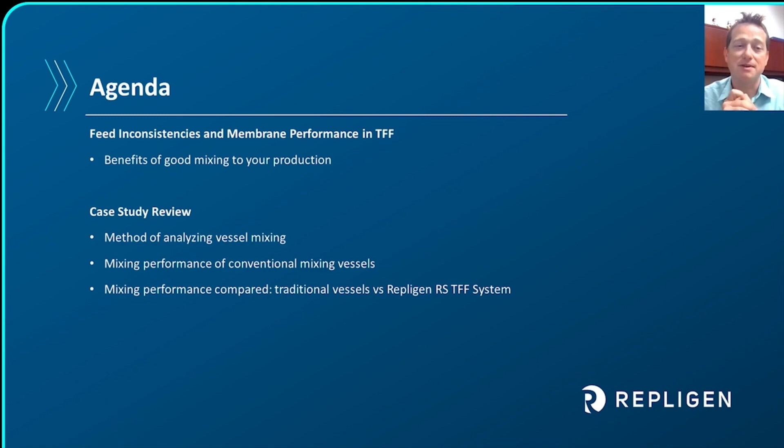In TFF, practice and common sense dictate that if I maintain the same operating and process conditions around my filter, then I should have consistent membrane performance, both between batches and during scale-up. But that's not always what happens. How many times have you experienced changes in membrane performance right after scale-up or between batches? And if I'm maintaining my molecular weight cutoff, my filter format and chemistry and TMP and CFF, why do I start seeing deviations arise? This is at the heart of what our study will address today.

That of all the parameters that are often monitored and maintained during TFF, feed consistency just often isn't one of them. Now, for some processes, particularly at lab scale, the recirculation flow back into the vessel alone provides adequate mixing. However, more often than not, we just assume we have great mixing as we scale from stir bars to big process tanks. So we miss issues like inconsistent feed properties created by inadequate retentate vessels and the lack of homogeneity, and end up with poor membrane performance.

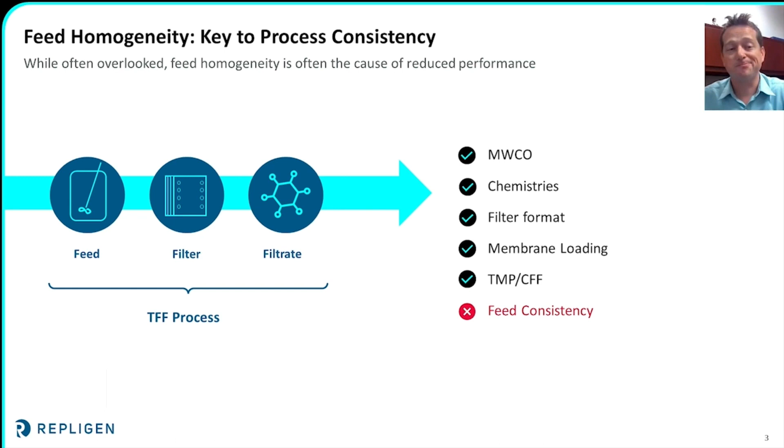And that's really the issue. The primary source of feed consistency issues is due to limitations and drawbacks of conventional mixing vessels. The reality is that most mixing vessels used in TFF applications today don't meet the intense mixing demands of TFF processes.

Inadequacies in the mixing dynamics of most vessels can allow stratification, localization, or short-circuiting, as demonstrated in this animation. Here we can see that the addition is not completely mixed in the vessel, but allowed to go nearly untouched out to the filter, creating a portion of the feed with an abnormally high concentration, and likely leading to lower membrane performance. All of these types of conditions lead to just that, variations in the feed delivered to the membrane.

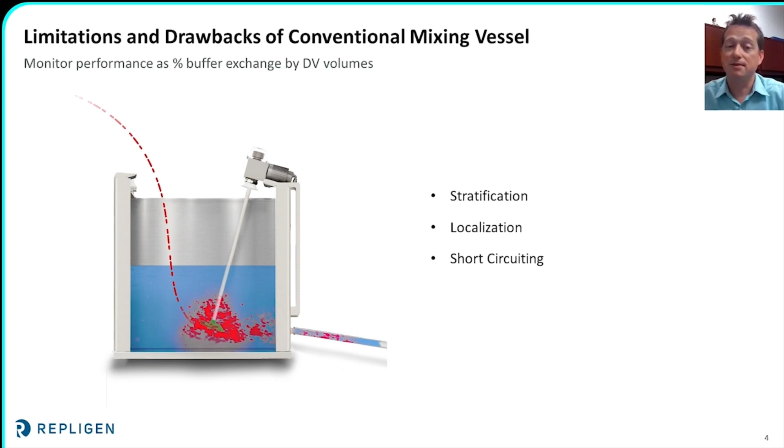This is why adopting a method for analyzing the homogeneity of the feed in early stage development and utilizing the right mixing vessel is so critical. By doing these two things, we can optimize the TFF process to reduce the headaches that come from deviations at larger scales. If we can maintain a homogeneous feed solution, then our process will be more efficient, more easily controlled and within tighter tolerances, and be more predictable.

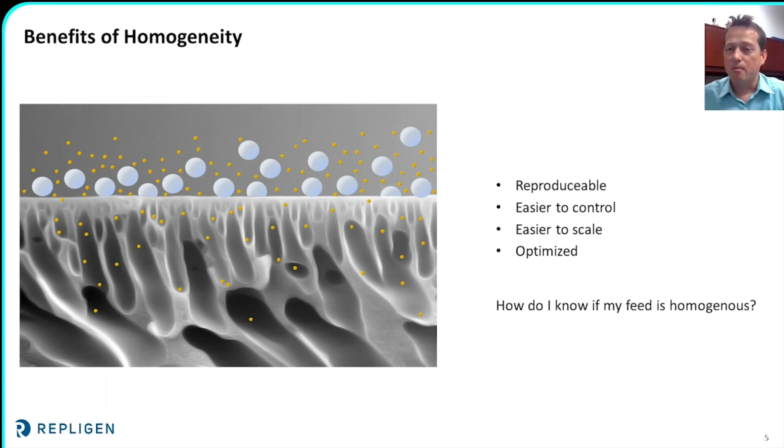But how do I know that my feed is homogeneous? The good news is you don't need some fancy new tool or widget or enhanced computer modeling to analyze your feed consistency. The best tool is something you already have. You can monitor your membrane's performance during the TFF process to watch for feed inconsistencies.

Today we are going to focus on one TFF process, and that's diafiltration. During diafiltration, we are using the filter membrane to separate a solute, such as salts or proteins, from a solvent, while simultaneously diluting with a new solvent. This is often used in bioprocessing to exchange one buffer for another while retaining your target proteins. Typically, this process is tracked by the number of vessel volumes transferred through the membrane before we completely change from one buffer to the next.

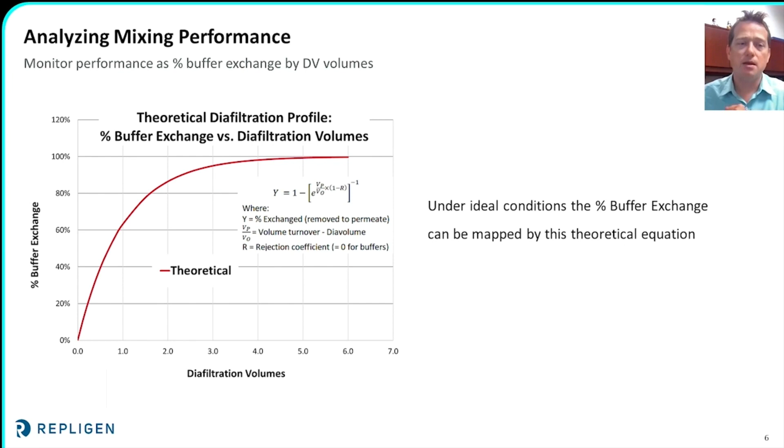Prior to the first DV, the control profile shows a lower degree of exchange than expected by the theoretical, meaning that the feed to the membrane during this stage has a higher concentration of the retentate than would be expected from a homogeneous solution. Beyond the first DV, the control profile exceeds the theoretical, suggesting a higher buffer concentration. But we know that in an ideal homogeneous condition, we shouldn't see this. So we can see that inconsistencies in the feed solution to the membrane affect the permeate flow across the membrane.

You might look at this and say, well, they both reach 100% buffer exchange at about the same time. What's the big deal? Well, one, you're right. In this example, the number of diavolumes was the same. However, what this chart doesn't show is the amount of time that it took. Decreased flow rates extend how much time your product spends circulating around the retentate feed loop. More time equals more exposure to shear, meaning poor product quality.

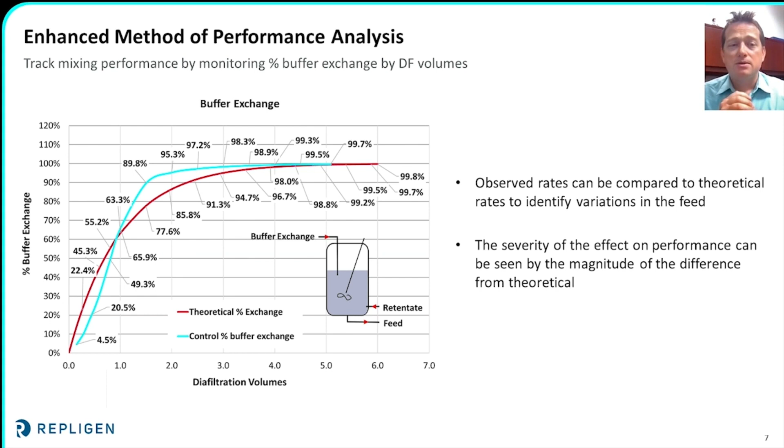So let's look a little closer as to why we are seeing these deviations by getting a close-up to what is happening at the filter. The performance of the membrane is highly dependent on the tightness and thickness of the layer of retained molecules pressed against the membrane surface. This is often referred to as the gel layer.

The formation of this layer has a direct effect on both the permeate flow rate and selectivity of the membrane. Even small changes in cross-flow flux, transmembrane pressure, or feed characteristics have an immediate effect on the formation of this gel layer, and consequently, on the permeate flow rate.

So, by observing the buffer exchange profile during diafiltration, we are monitoring these conditions around the membrane. Because the membrane is so sensitive to the feed, we can use it to directly and accurately monitor those feed variations, which are truly significant to performance.

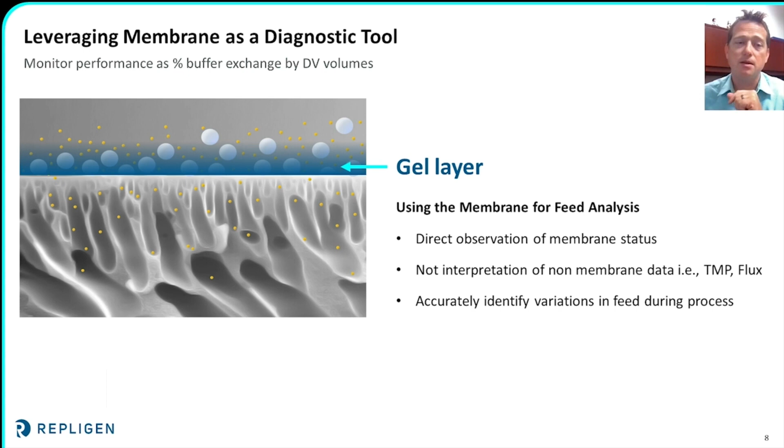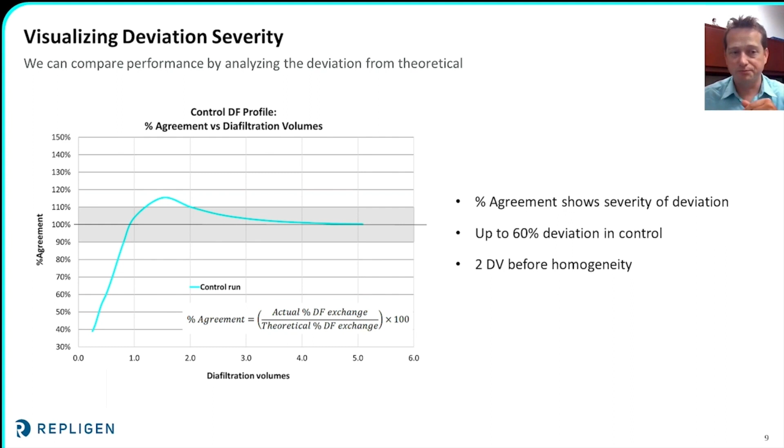Next, we'll move to analyzing the mixing performance of Repligen's mixing vessel. But first, I want to introduce you to its unique design and features. Our tulip tank, to my knowledge, is the first single-use mixing tank specifically designed for optimizing TFF performance that's available on the market today. It is a square self-baffling tank with a uniquely designed sump section.

The tank has two independently controlled impellers, which allows for mixing in both the sump and the upper volume. It also has multiple return lines. This helps distribute the retentate throughout the tank, enhancing mixing.

As the fluid level drops, like during concentration steps, the system uses the load cells to detect fluid level and slow or stop the impellers before they reach the fluid surface to prevent high shear churning and foam creation. It also uses the system's valves to adapt the route of the retentate flow to prevent air introduction and foaming from returning above the surface level.

You'll also notice that unlike conventional vessels, like we saw in the control run, the addition is not brought directly into the tank. Instead, the addition enters into the retentate return flow, so it begins to mix into solution before entering the tank and is more evenly distributed. The sump features baffled walls and a flow diverter, which routes the flow along the walls rather than directly to the center above the outlet.

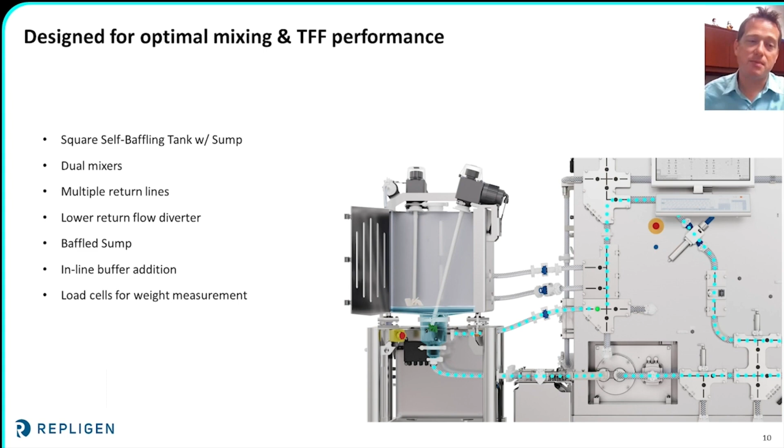Because the volume of the 40-liter run, run A, is well above the upper impeller, both the upper and lower mixers were utilized, with each set to 100 RPM. As well, both retentate return lines were used. These conditions were chosen to evaluate the mixer's performance with a high volume and relatively low CFF rates and impeller speeds.

Those of you with a keen eye for mixer design may have noticed with this tank that if you were to be running at a volume where the upper impeller and upper return lines shut off, then you may be left with a section of the fluid above the sump which may not be mixed by the lower impeller and lower return flow in the sump.

If you did, good work.

You're a smart cookie. The 10-liter run B was specifically designed to test just that. If there are zones created which are not mixed, then we would expect to see deviations in the buffer exchange performance profile as those sections reach the membrane. The results of these two tests were analyzed using the same method we did for the control.

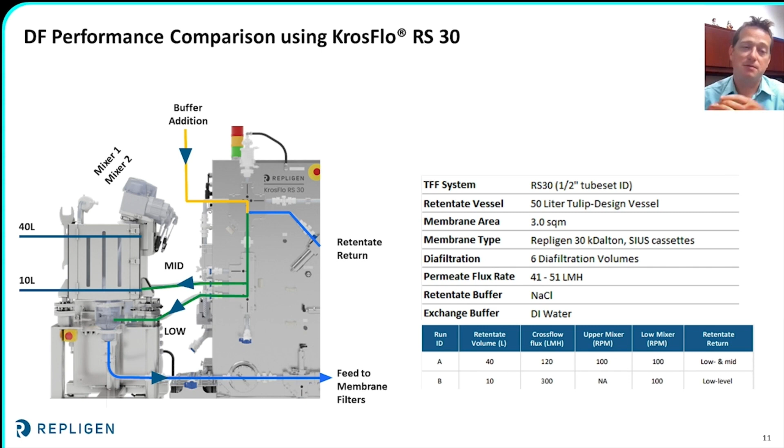It's also interesting to see that despite the significant difference in the process conditions between the two runs, the result profiles are nearly identical, meaning that the system was able to provide equally great mixing in both circumstances. It also shows that those potential dead zones in run B we discussed earlier mixed just fine, because we didn't see significant deviations in performance.

In stark contrast, we see in the control run significant deviation from theoretical, and it doesn't settle within that plus or minus 10% we achieved in the tulip tank until after 2 DV, meaning it took over 2 DV for the conventional vessel to reach and maintain homogeneity. Overall, we see in these two runs that the vessel was able to provide the membrane nearly ideal conditions.

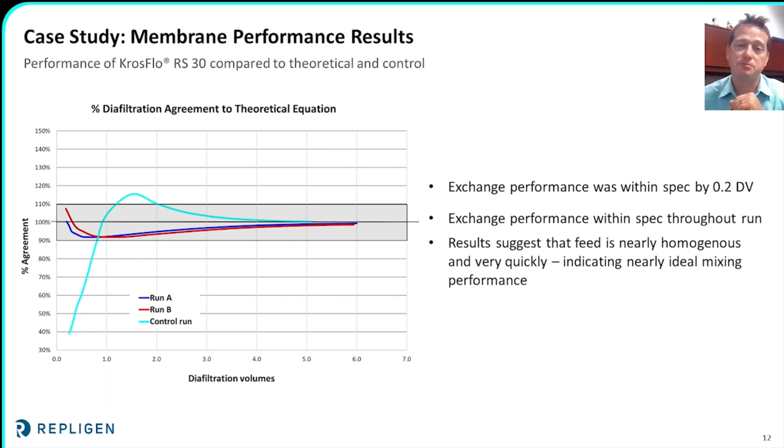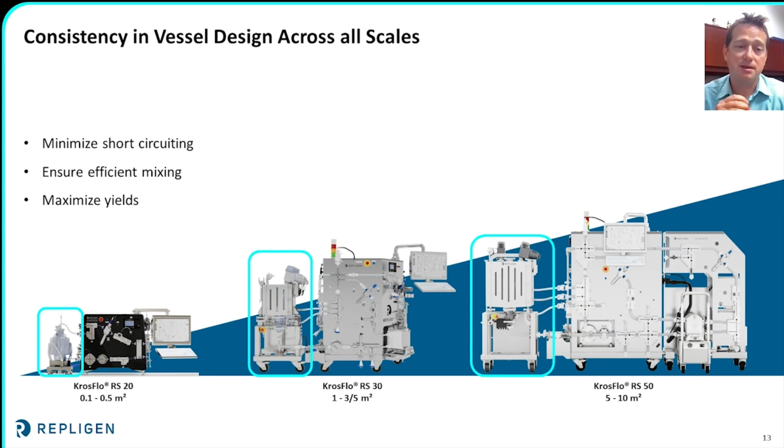So, just to summarize, we've developed a method of analyzing feed homogeneity by tracking diafiltration exchange performance. Using this method, we've been able to analyze the performance of conventional mixing vessels and noted the deficiencies in their performance. We then reviewed the design features of our KrosFlo RS30 TFF system and analyzed its performance in providing a homogeneous feed, and saw that it was on par with the theoretical model of ideal mixing.

Our study revealed that the RS30 showed drastic improvements over traditional mixing vessels used in TFF applications. The key takeaway here is that our KrosFlo RS TFF system and our tulip tank can be used in TFF applications to provide more reliable or optimized performance that's easier to control and scale.